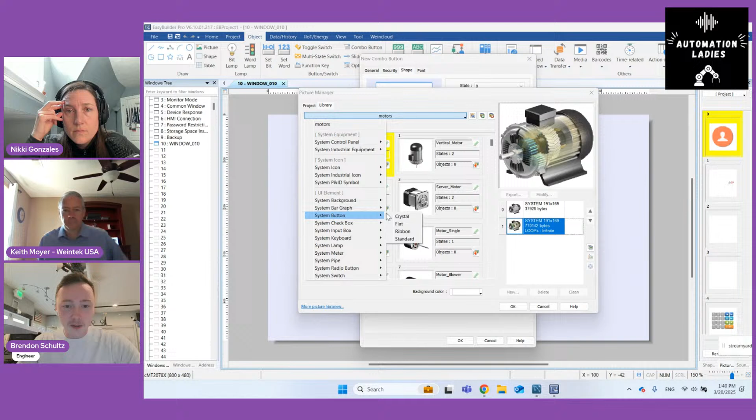But really, we have so many images here. We even have cool images of like motors, for example, that can be used to indicate when things are on or off. So we have kind of GIFs running, very cool image styles. It's very cool. You wouldn't always see these because they're kind of hidden behind the scenes. So this is a little secret tip there. You can find those in the Browse Library section. I'm not really going to use a motor image for this. Let's just create a very simple looking button here.

But on that note, I've been asked before, but we support full multimedia on the HMIs as well, right? So if people want to play videos or they have their own animations, those are things that people can put on the screen too.

Yeah, absolutely. We support images, videos, PDFs. We can look at IP cameras. We can do a lot. We have web browser objects to view web servers on. So if you're working with like a CODESYS device, it has its own separate HMI, you can use our web browser, our PLC web browser object to view that. A lot of cool stuff, a lot of cool functionality there.

Yeah, I think I saw one of our customers, Hamrick Packaging Systems, in one of their demos at, I don't remember what it was, Pack Expo or something, but they were running Olis robotics, which is like a camera system for monitoring robots when you're not around, remotely monitoring the robots, and if you get an alert, you can review the footage, kind of like you do with dash cams. If something happens, you now have the footage of what happened to try to do remote diagnostics. But it's cool because they were actually also showing it on the HMI for the cell. Then you can access that remotely, both through the HMI and in their own software. But that was an application that I hadn't seen before.

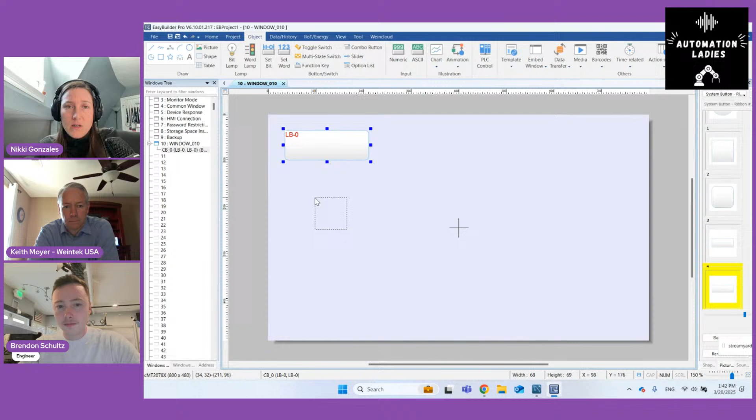And then I was just talking to somebody that wasn't really familiar with our HMIs at a panel shop the other day, and he was like, okay, I'm going to put this to the test now. The main thing I'm looking for is, do you have enough image libraries for me?

I'm always disappointed, especially with free stuff, that it's going to be super limited in the images available. I think he'll be pleasantly surprised going in here, but it's good to know that there are extra images and things outside the main menus if you need more.

And not even to mention that you can import images. So you can use whatever images you want if you have your own brand stuff. I've got a lot of customers that have imported their own custom graphics. They scale really nicely and have done some really cool stuff.

There are more and more companies in the space investing in cool branding and having everything on the machine look and feel like it's their thing. To be able to do that with a traditional HMI versus having to go into developing something else, I think is a really nice option. More companies should think about doing that.

Or like have a website. I was looking at Pack Expo exhibitors the other day, and some of them spent enough to be exhibiting at Pack Expo, but then they don't have a website to link to in the exhibitor directory, which blows my mind. Bummer.

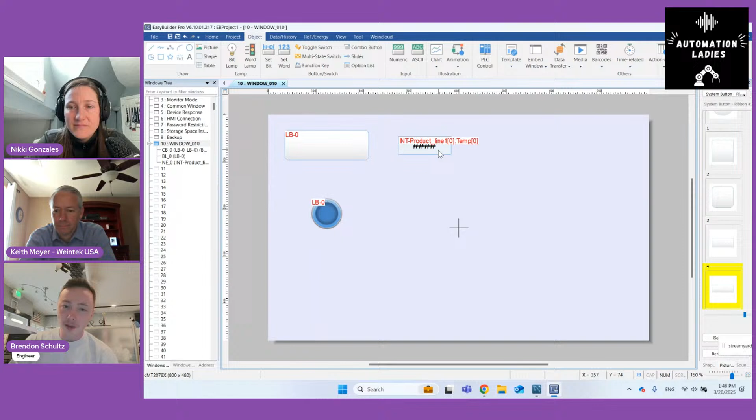Yeah, absolutely, I've had a plethora of customers that want to keep the same look and feel just because that's what the operators are comfortable with.

Just on that note, while I was going in here - this is our numeric object, these are just really basic objects. I came in here with zero programming background and kind of figured it out, so I think most people can get in here and play around with the tabs to figure this out. If you're in the general tab and you've added a driver like I showed earlier, you can use this device drop-down list to select what object, tag, or device resource you want to access.

And this is going to be, for this numeric object, our read and write address. So we would read data from this and write data to it, or we could use separate addresses. A lot of objects support separate read and write.

There's a lot of configuration options in the numeric object. I'm going to skip over them since they're covered extensively in other videos and resources, but I'm placing some objects here just so we can see how they look.

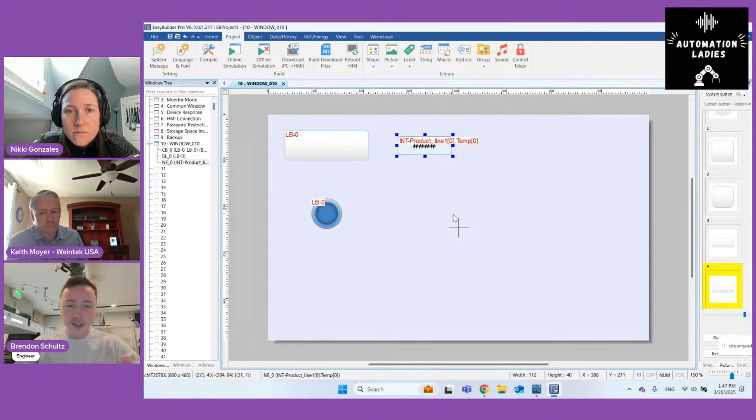So if you've opened EasyBuilder Pro and placed a few objects, you can go to the project tab, click on this offline simulation button, or our simulation buttons, and create a quick project. I'll just give this a random name so we can get something going.

So it's going to save and then compile, and after a couple seconds it'll boot up. This would be kind of what you'd see if you have the actual HMI in front of you. It's very cool because you can navigate to different screens and test out the look and feel of your project before you ever download it to the HMI, so you could already begin development.

Now, on that note, this is an offline simulation. If my computer was actually connected to that Rockwell controller I added, we could use online simulation and actually read and write real-time values to the PLC. That online simulation feature works with a very good portion of our drivers—I don't think I've really encountered any that it hasn't worked with. So online simulation is a very good testing tool if you have the controller but not the HMI, as long as you have your computer. Very cool.

And then the CMT Viewer is an app we have that's used not just for simulation, but also to view your HMI if you have one in production. Keith, you want to give us a quick rundown of CMT Viewer?

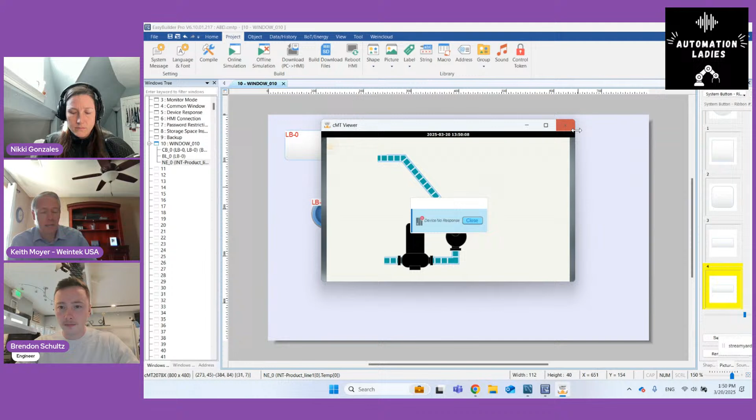So the example I give so you can grasp it: an operator can be standing in front of the screen on screen A, somebody else could be on their iPhone on screen B, somebody else could be on their Android tablet on screen C, all with a simple Wi-Fi router in the mix. It allows you to act independently without interrupting each other. So it's pretty powerful, it's free, and it's included with all of our X Series HMIs and our screenless HMIs.

Thank you for that, I forgot. Yeah, I actually, when I was talking to somebody last week about this, he immediately, when I mentioned this feature, was like, wow, that's huge. If I could have had that for these last 3 projects I did, that would have been so cool.

I think from a practical standpoint, there's the example I gave on the floor, but where I've seen the feedback from our customers is with startups and commissioning—those kinds of things allow you to not have to be right in front of the HMI. I can be bumping motors, checking photo alignments, or whatever, and not have to be right in front of the screen, but I can have that screen in my hand, so to speak. So pretty powerful.

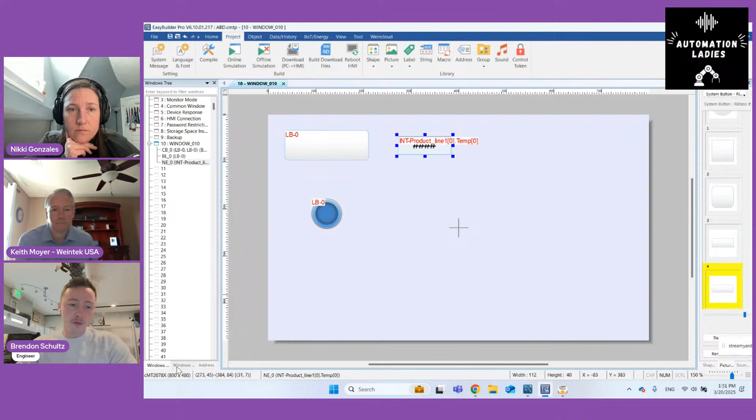So I didn't even think of it this way, in a use case where you don't even have the HMI yet, but you can pretty much use CMT Viewer as your HMI to test things. It would just be this simulation right here. Offline simulation automatically opens up an instance - for example, if you're working with a CMT series, CMT Viewer is that simulated instance.

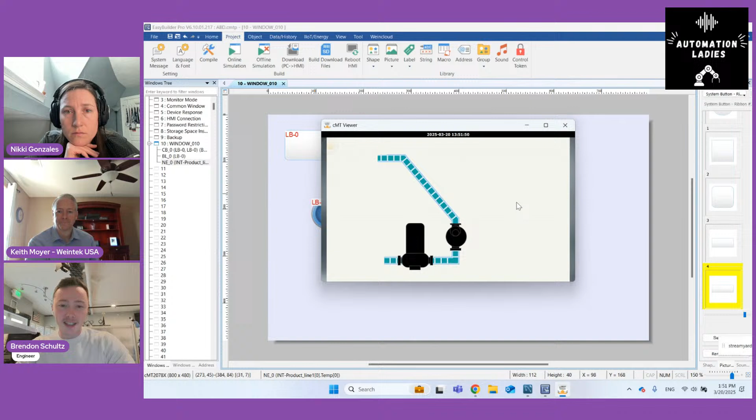So I have over here this real instance of this project that should be connected to a controller, but I didn't connect it because I wasn't going to download to it. So this is a CMT Viewer connection. I don't have any other extra windows in here really, but I could. And as Keith mentioned, I could navigate to various different windows and do it separately from whatever the operator's seeing. So whatever I work on in this application is going to be different from what's shown on the HMI.

So the HMI is shown here. If I move to a different window in CMT Viewer, they wouldn't see that. However, if I did turn on a button or entered a value in here, you would actually see that on the HMI and in CMT Viewer as well. So, very cool tool.

We have a lot of cool features here. I really wish we had more time, and sorry to keep interrupting you - I know you've got a plan of what you want to show, and we're taking you all over the place, but that's all right. No, I think it just kind of goes where it goes. And by the way, those of you in the audience, if you have any comments or questions or anything you'd like to see, let us know. We've got roughly about 10 minutes left. We may let it go over a few minutes if need be.

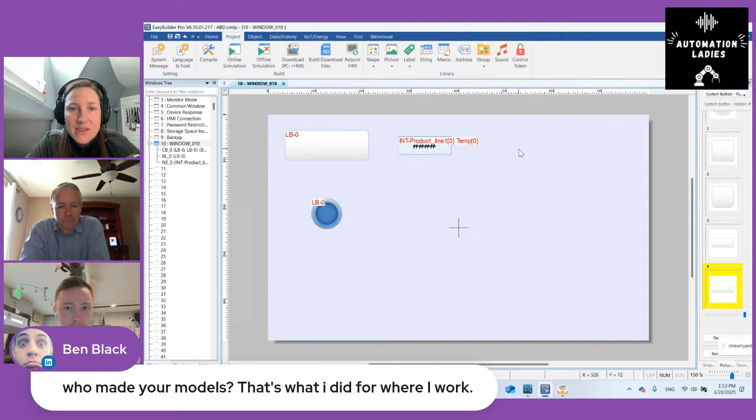Ben asks, who made your models? That's what I did for where I work. Who made our models - like, model, like... Yeah, what do you mean, Ben, by models? You mean the graphics, I'm guessing? He means the graphics, yeah.

Oh, that's a good question. I'm sure we have a whole dev team just for graphics, like we probably do just for drivers. I know that we have a driver team, so I don't get to really interact with all of the different R&D teams there, but I know we have separate divisions for those. I'd imagine there's a whole division just for graphics, especially for channeling those into newer versions of our software that may be released in the future and are in current development. They have to make sure those are compatible with the new versions.

So yeah. And look who's joined us on the other side, Allie. Hey Allie, how do you do alarms? I know that's one thing we did plan to cover, so yeah, I did have that in here actually.

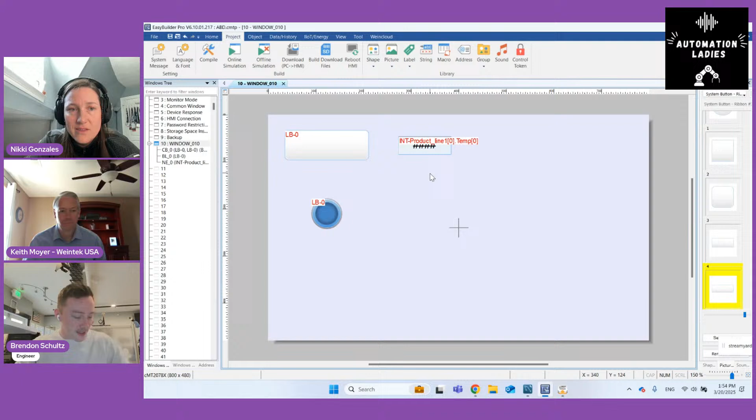That's a great question. So everything here is pretty easy. If you go to the Data/History tab, you'll see we have an Event Alarm Log, Data Sampling, and a bunch of different feature sets here. But all that for alarms is going to be in the Event Alarm Log. So we'll go in here and create a new alarm. This will be something that might display in an alarm view object. We can reference whatever tag or register value from our device, so let's say that seems appropriate.

Let's say if this is greater than 32, then an alarm will be triggered. And what is the alarm going to say? Well, the alarm is going to say something defined within the Message tab. I think they try to keep things pretty easy here, so - like a legitimate alarm there. And we'll go ahead and just click OK. That'll add our alarm instance.

And of course, you can keep adding additional alarms. You can even copy and then do a paste-add and just make slight modifications to some existing alarms - sometimes that's preferable rather than adding each new alarm instance. We also allow exporting to Excel for editing outside of EasyBuilder Pro. Actually, a lot of our features do that.

And then if you want to display that alarm, we'll go ahead and open maybe an alarm display - that would be an appropriate object to use. Here, we don't really have to change anything. Maybe I'll disable this caption option, but everything here is just going to work already. We can simulate it and then just see how we feel about it. So I have this alarm and it should be reading from this value here.

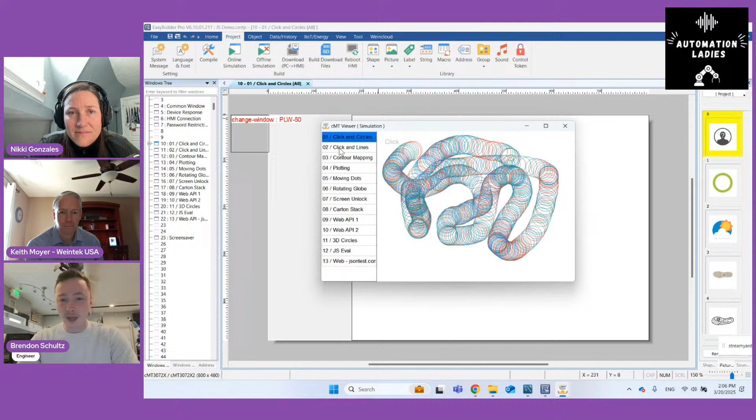But we can do things like drawing using Canvas in JavaScript, adding, plotting. We could do some sort of advanced mathematics with JavaScript, things we couldn't do in macros, we can do here. We can also see more graphical animations that you can make with JavaScript, or even some sort of almost three-dimensional construct that we have here with JavaScript.

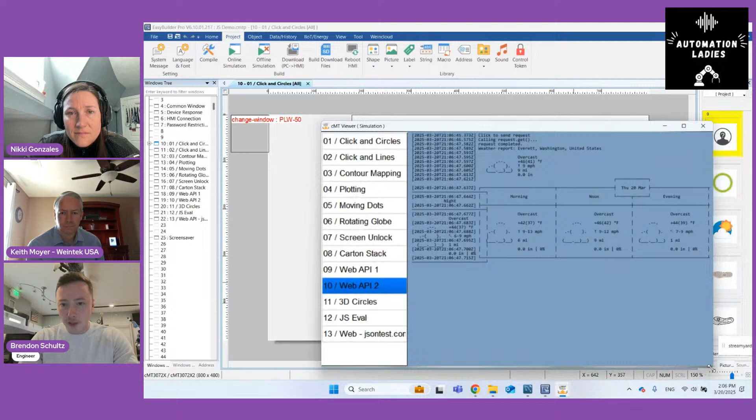We can pull data from APIs. This, it's hard to see because it's so small, but this pulls the weather near a city, actually pretty close to where our office is located, and displays it all in text. This is just pulling it from this kind of weather resource.

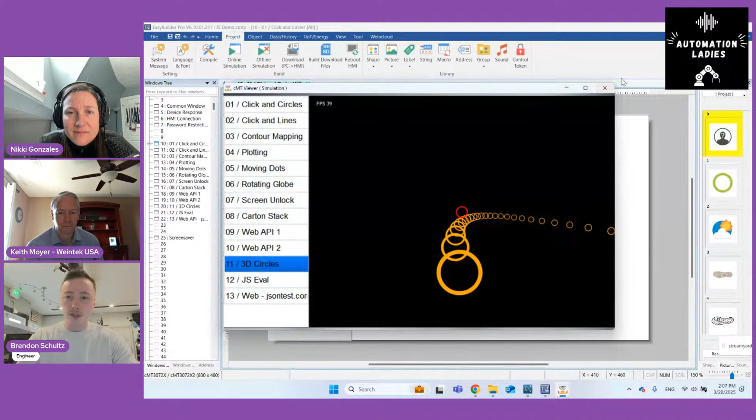And then lastly, I'll just open up this little SQL demo I have here, just because I'd like to show how easy these things are. So we have basically an HMI project that could be pulling data from a PLC. In this case, it's just pulling it from our HMI's internal memory, simulated on my computer right now.

And I have a locally connected, locally hosted SQL database. All we have to do to get data from, for example, a data sampling object into SQL is just say sync to database. So once we've set up the database parameters, you just enable sync to database within your data sampling, and our HMI will reach out to your database and build those tables. I can demonstrate that in real time because it's super easy.

So if you have any SQL experience, this will be a breeze to set up for MySQL, and typically for other SQL platforms as well. I had no experience with Azure SQL, and I did end up getting that set up after Microsoft very slowly granted me permissions to be able to create a database. I did have that set up.